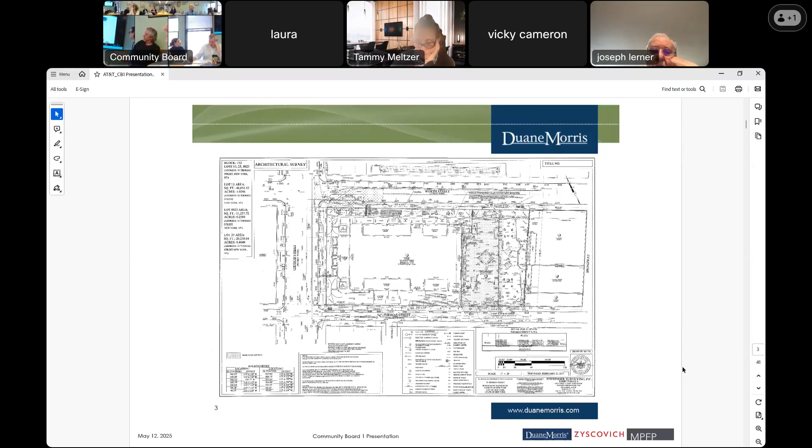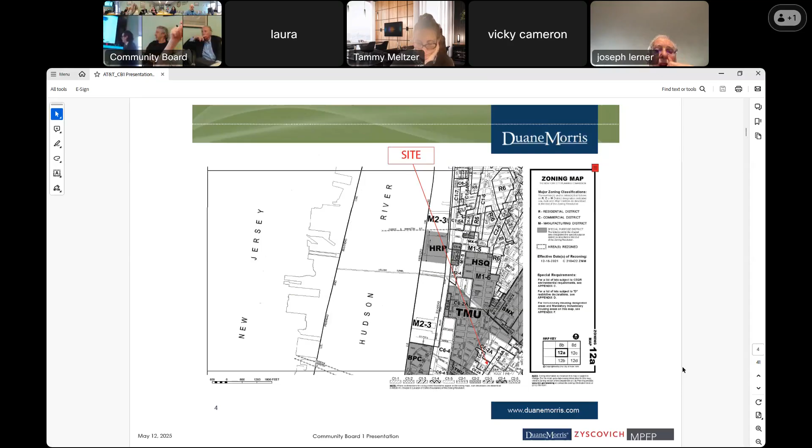And this is the zoning map, of course. This is the block that the property is located on. It's partially in a C6-4, partially in a C6-4A—a contextual district. Hello? Itself. Hello, I know.

You're good, keep going. And then just the detail of the blocks. Again, this is the block on the tax map, and we've outlined the area of the block. And you can see that.

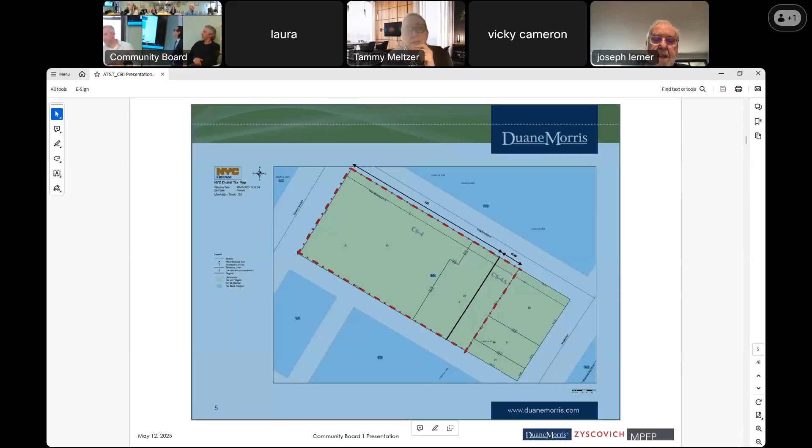Make that larger, apologies. That may be where Joe's going because I can barely see it as well. Can you? Sure, hang on one second. Yeah, thank you.

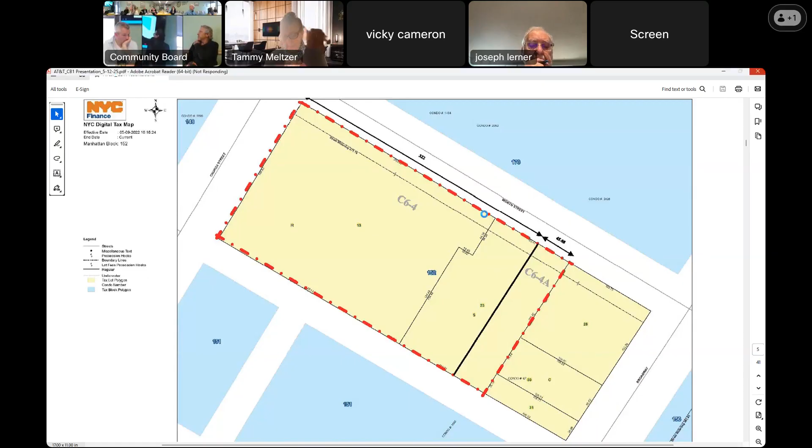Okay, and so of the property, about 75%, or more than that—57,000 square feet of the 65,000 square foot lot—is located in the C6-4 zone, and the other roughly 8,000 square feet of the 65,000 square foot parcel is in a C6-4A zone, and that's the zoning district boundary line.

It froze. If you could just advance it then. That'll probably just take a minute. Thank you. Happens to me every day, 5 times a day.

You said about 80% is C6-4. Right? Yeah, about 80, 85 actually.

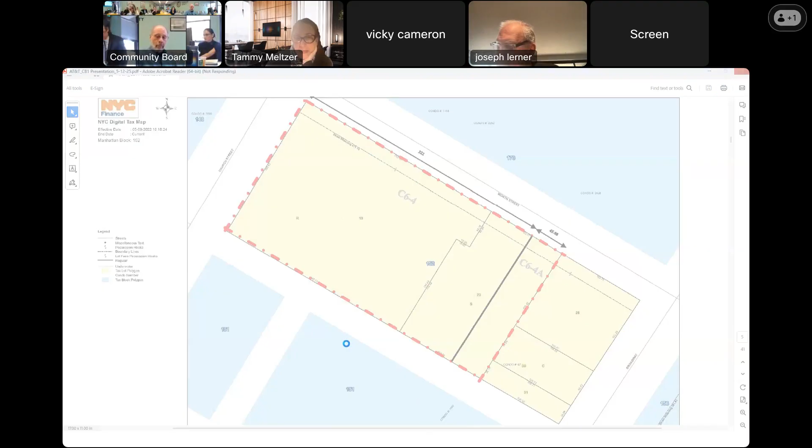We might need to reset it before it advances to the next slide. Reset it to the size you had. Maybe increasing the size had an effect on it.

Sean, while we're waiting, could you explain the difference between the C6-4 and C6-4A? I'm not familiar with those terms. Sure, so a C6-4A is a contextual zoning district, and I'm actually going to get to this later in the presentation, but I'd like to wait. Okay.

So a sailor walks into a bar.

Is it a heavy file? Should I advance it? Can I advance it? Oh, no, no, you still got the eye. Yeah, if you keep hitting it, it's just going to, no, you're going to get it mad.

While we're waiting, could you tell us the history of the plaza? How much of a give back was that to the community? How many extra floors did you get on the AT&T building?

So there was no plaza bonus taken in the development of the AT&T building in 1967. They could have utilized it, but for the purpose of the building being built, the communication building, they didn't need the bonus. So it's not a POPS plaza, it's just a private plaza, and that's why it's open and closed sort of at the whim of AT&T.

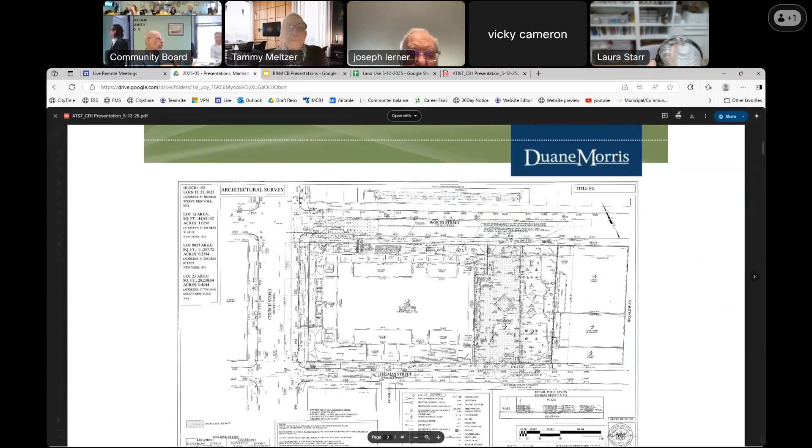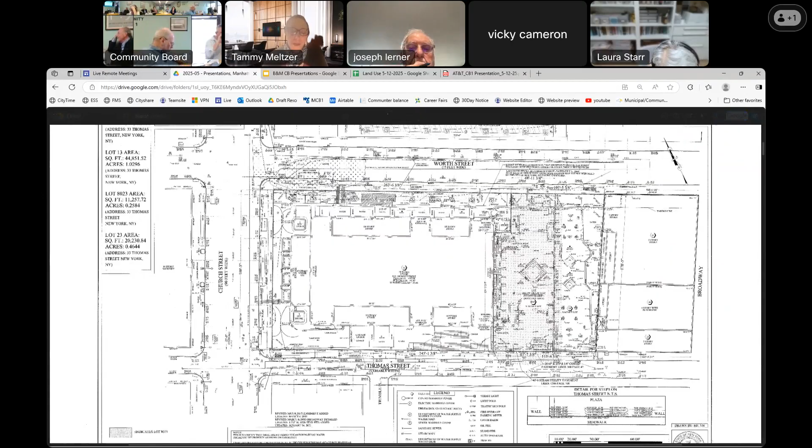Okay, I found it. I got it. Tammy, we have it up for the moment. If not, thank you, I can help you, just in case we crash, Tammy. I'm a good backup. Keep on the next. If we can just advance it. And then one more.

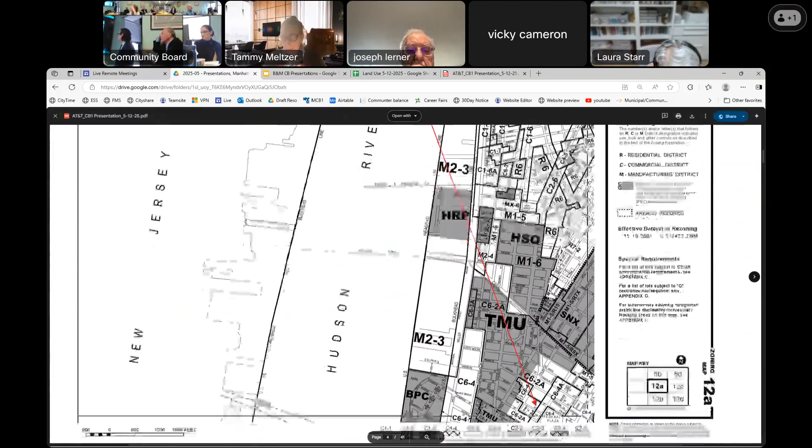So, widening out the area a little bit more, this is the site. To the north, south, west, and east, the surrounding area is all zoned C6, just like the property is. Different variations and permutations of C6, C64, C62A, C63A, C64A, all permutations of a C6 zone. A C6 zone is a high density, metropolitan kind of area, a lot of hustle and bustle, with a wide variety of commercial uses, residential uses, and permitted community uses.

C64 zones carry an FAR of 10.0, base FAR of 10.0. So the big development, before the recent City of Yes, that's more or less the biggest development you could do in the City of New York, other than in the special Midtown district.

And the developments in the area are consistent with their zoning. Orange is mixed use, red is commercial development. So you can see in this C6 area, the predominant development is either mixed use or commercial. The buildings in the area range from a 50-story building across the street from the property, down to a two-story walk-up on the same block, and six-story walk-ups on Broadway on the same block as the 50-story building. So it's a hustle bustle district, and it's developed consistent with its zoning.

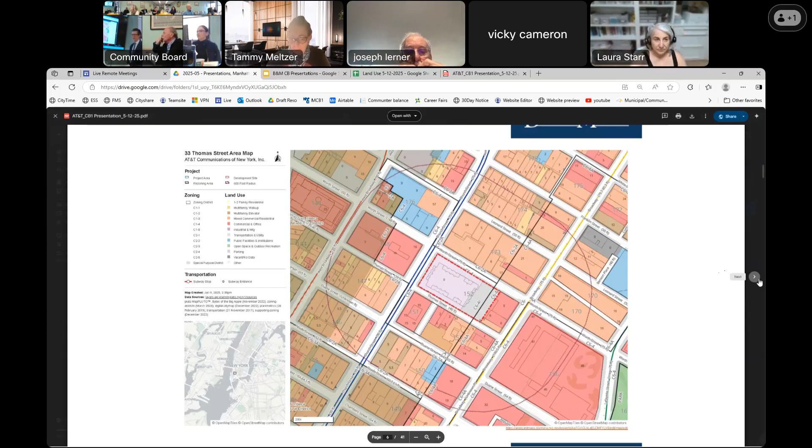So that's a little bit of setting the property with respect to the history of the property, and then leading into the rationale. Why is it that AT&T wants to sell the plaza?

So the AT&T building that we all know and some love was developed in 1967. It was developed as a major telecommunication building. It receives and forwards calls that come not only in from the city of New York, but also the surrounding area nationally and internationally. The building stands 535 feet in the air.

It's got 597,000 square feet of floor area, more or less. This building, we're here to talk about discretionary actions for the plaza. The building itself was built pursuant to a discretionary action.

It was built pursuant to a special permit for the tower portion of the building, which is above the 11th floor. The special permit allowed for an increase in the area of penetration of the tower within 50 feet of a narrow street, Thomas and Worth Street, on both sides. It was a small discretionary approval, less than 1,000 square feet of increased area penetration of the tower onto the narrow streets.

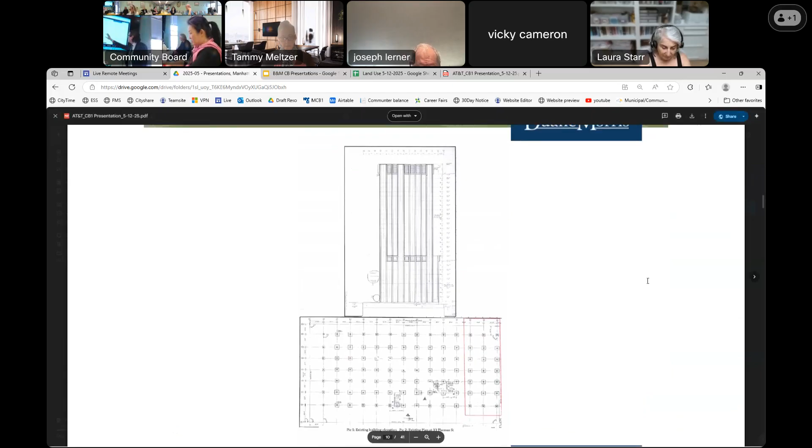This is just a screen that shows what I'm talking about in terms of how the building was built underneath. This is the AT&T building. Underneath the AT&T building are 3 subcellar levels, and those subcellar levels extend underneath the plaza, underneath this lip. So this is the columnar grid of the founding of this building.

So you can see that the columnar grid of the building, up to this red line, is of a particular pattern that then extends underneath the lip of the plaza. And so the building was actually built this way.

It was contemplated that the building someday may need to be extended, a heavy building with heavy columns in a particular grid that would carry the loads similar to the load of the existing AT&T building. So it could have been moved over into the plaza.

Don't need it anymore. And as a result, now for sale.

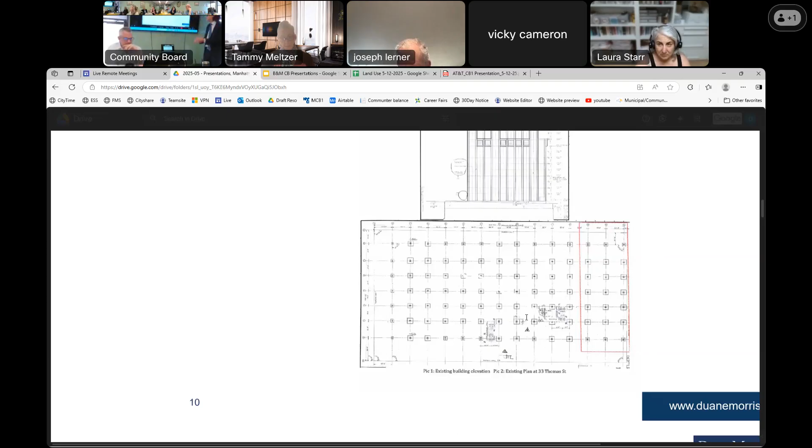So once AT&T decided that they were going to sell the property, they hired Duane Morris, they hired my firm and their other building consultants to consider the site and analyze how to maximize the development potential on the property—not the whole property, just the plaza area for sale.

They also asked us not only to think about how to increase the potential of development, but how we were going to market this when we finally took it to market. For example, if there are discretionary actions involved, are we just going to write a letter in the marketing package saying, hey, this can be done?

Or are we, AT&T, going to go to the city, get the approvals beforehand, and then take the whole thing to market as a turnkey administrative approval? This is what we considered for almost a year, actually.

Our conclusions were as follows. The first thing we wanted to do is maintain a plaza. It wasn't altruistic, but it's been there. We knew we had to come to the community board ultimately, and it's a benefit to the community to have the plaza. It wasn't altruism, but we did want to maintain the plaza.

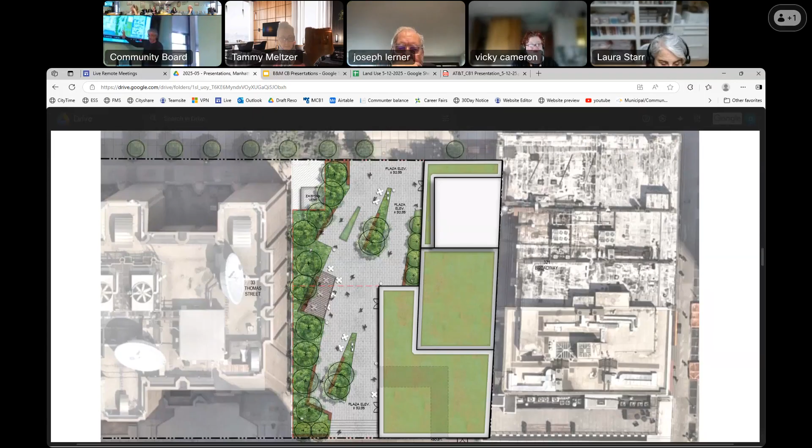There are steps here, right, along this, right? And you see this dash line here. We created this little jewel box component of the ground level, and there's ADA accessibility in here, because that's what gets us above the structural deck. And you'll see it in section. We worked through this with city planning quite a bit. There was really no other way to get any ADA access on this level.

And so you'll see it in a before and after. So if you go to the next, that's what we have today. So the structural deck is right underneath where these cars are. It's only like 4 inches underneath that. And so that's our problem.

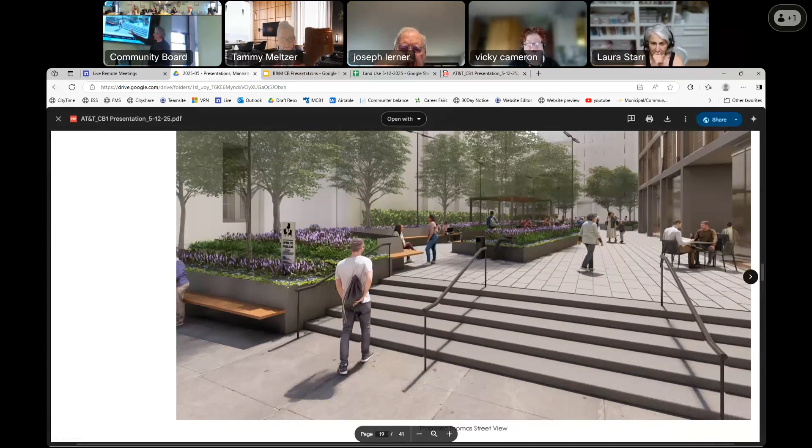What we did is we turned this wall into a stepped planter with a seat, a bench facing out. We opened this up as stairs, and then we put, if you go to the next one, you'll see, that's the before and after. Right, so these are the steps. That's the built-in seating. The other action we have is all these planters are raised because we only have about 6 inches or so above the structural deck to work with. So those are our two actions for the plaza.

Obviously, trees are supposed to be flush, plazas are supposed to be level. It is level on the other side. So if you go to the next one.

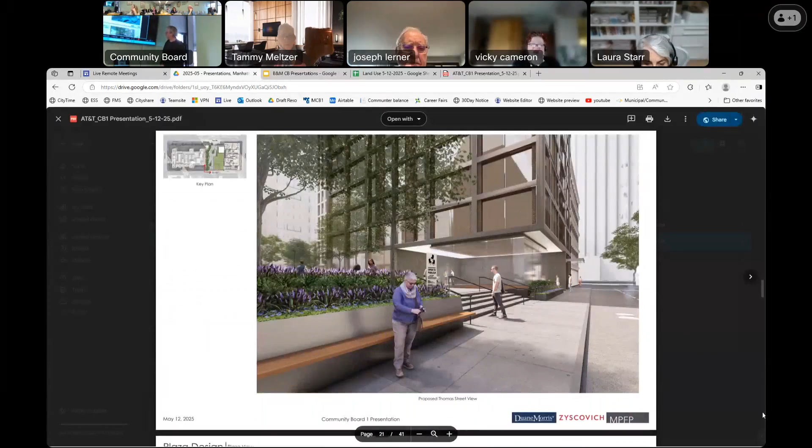So this is the before, steps here. Our building will go here. There, and one more, next one. And so there's the building. This is the glass box here, little retail component. The ADA access is behind it. So if you go to the next drawing, you'll see that.

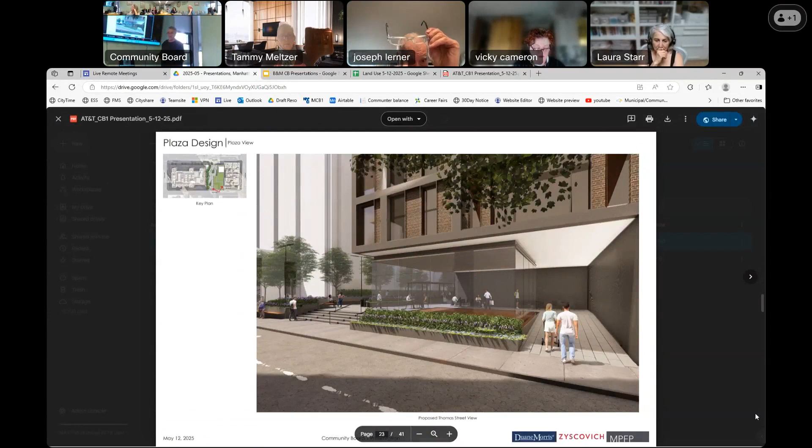That's the before, it's the after. So ADA access here, under 5%, no handrails, just a general slope up, but it gets us above the structural deck by the time we get back there. So that was our big challenge, and that's one of the actions. So if you go to the next one.

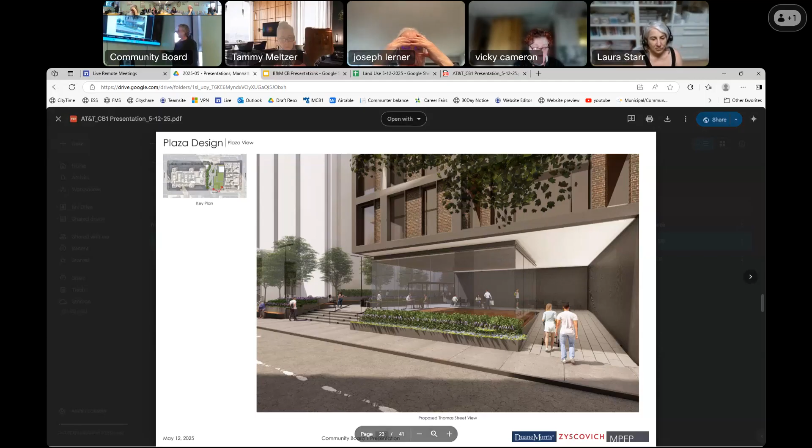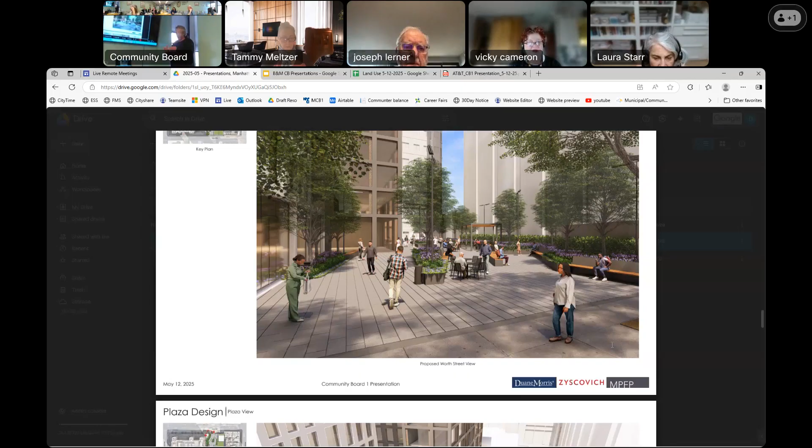This is the other side. So this is at Worth, and this is all flush. So in working with city planning, by keeping this entire frontage flush, we opened it up in the plaza steps, right? In principle, as you guys know, this is a through block, so it's actually zoned as 2 plazas. We have all that information here, all the technical information if you want to go through it. What we worked with city planning on was to create a central space in the middle that the community could use. There's a trellis there, it opens up, there's a lot of movable seating, and the planters kind of guide you through this, kind of a sawtooth type plaza design. And you'll see that in the aerial that comes up next.

So there's the trellis, that's the larger open space. And then these are all built-in seating to the planters.

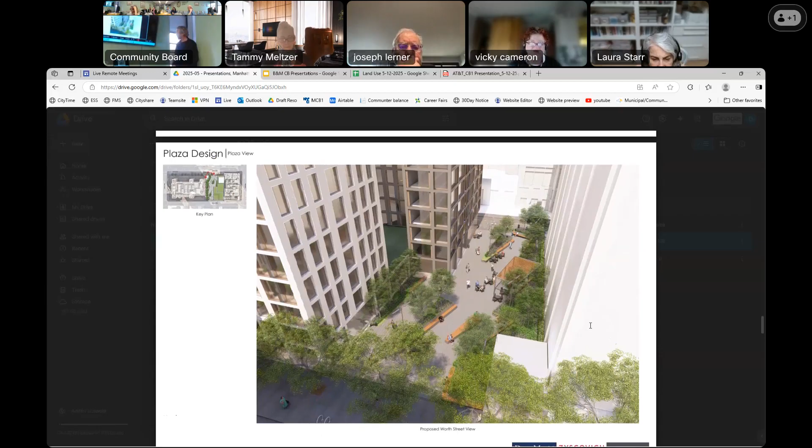Next. So this is all the technical information. So there's a plaza here, that's the through block. Then all the calculations come up in the next 2 plaza sections, which we don't have to go through much.

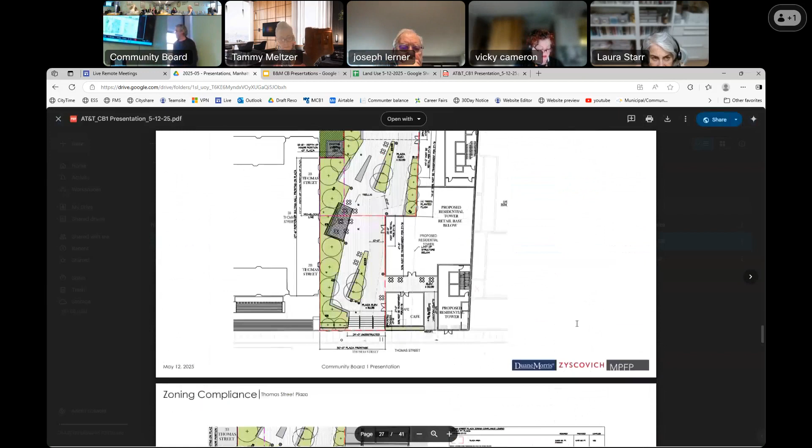Yet. Can you just go back one, sorry? Yeah. Just this, give me one? One second. Yeah, yeah.

Is the plaza across Thomas Street? Is there a plaza across Thomas Street? That from another development? I think there is. There is, yeah, I think there is. Right across top. Do they line up or are they, can someone? If you go back, you have to go to the aerial. I don't know that it shows up on that aerial. Yeah, they're not. Get it way up. Thanks, the 3D might show it too. I don't think it's a direct lineup. It's, just- that's not, yeah, it's over there. Opposite of it. Okay, yeah, they don't line up.

So, these are the calculations that show how the two plazas work on their own, separately. That's the ADA access up. We believe this is a cafe, retail here, more over there, and that's the big central open space. This is the 10-foot clear path through, and those are the steps—about 30 inches grade change.

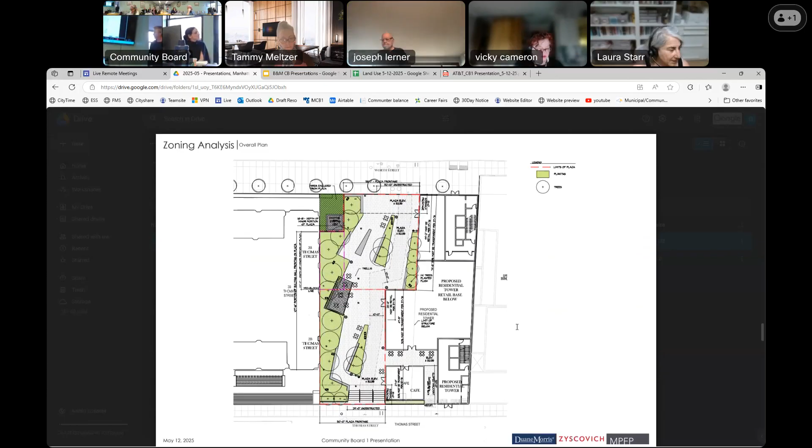That's it, we'll go into the building. The last one is there.

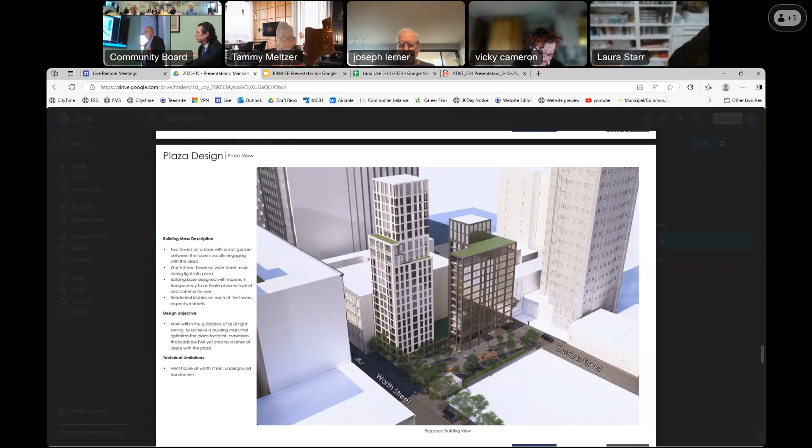Go, jump in for the next slide. I'm going to skip this, but John covered all the floor area. This is the key slide, really. So you have Thomas Street, you have Worth Street.

Oops, the appendix—I checked a little bit there, keep going back. All right, so you have Thomas Street and Worth Street, Worth Street being a wide street, Thomas Street being a narrow street. Each of the streets has its own set of regulations as it relates to height, setbacks, etc.

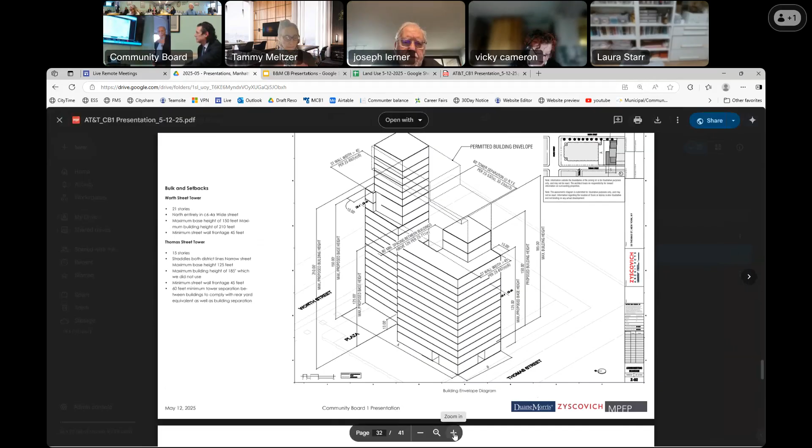What's driving this to a great extent is, as John described, in the contextual district, which is where we have most of the building, they prescribe base heights, they prescribe the setbacks, and they prescribe the maximum height. So we basically had to follow those regulations because, keep in mind, we're designing an envelope. Even though it looks like a building, at the end of the day, it's an envelope.

And that envelope could be finished in 50 different materials, but what we wanted was a massing that would work well with the plaza—a massing consistent with an as-of-right project. So what we did is work with the maximum base height to get the largest base possible, and did the required setbacks.

In the case of Worth Street, we went to the maximum height permitted, which was 210 feet. On Thomas Street, we did not go as high—we went to 150 feet as opposed to 185 feet. So we tried to work with the sun in terms of getting maximum daylight into the plaza.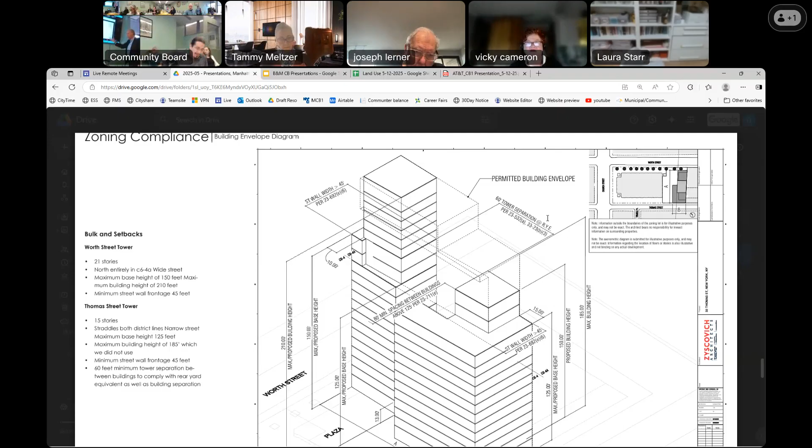We felt the other key element in terms of the massing that would be very helpful is that the plaza is not excessively wide. So the idea of having two slender buildings with a gap in between, and a one-story height building with a green roof, created more breathing room in the plaza itself. It just made the plaza feel that much larger. So that's really what's driving the massing of the building.

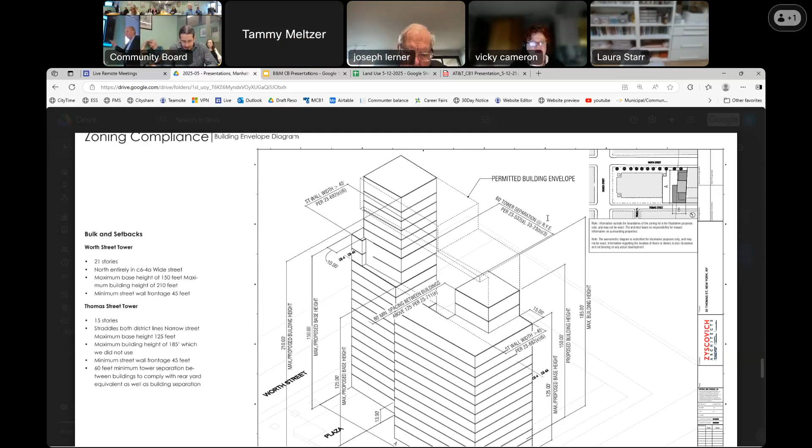Go to the next slide. Just to give you a sense of scale, this is a cross-section taken at elevation, along Worth Street. The building in pink shows the two towers and their relationship—you can see what the street looks like. We're not dealing with a lot of height here; these are fairly slender buildings. In section, you're seeing the same thing. So contextually, we feel that we've managed to work the zoning and the plaza together to create something that works well together.

Between the plaza and the building, we think they work together well, especially with that corner we discussed, which we call the jewel box corner, which leads you into the plaza itself. Visually, you can actually see through that corner to the entrance of the plaza, creating connectivity. We're trying to visually widen the plaza itself, which is the AT&T building and this other big building.

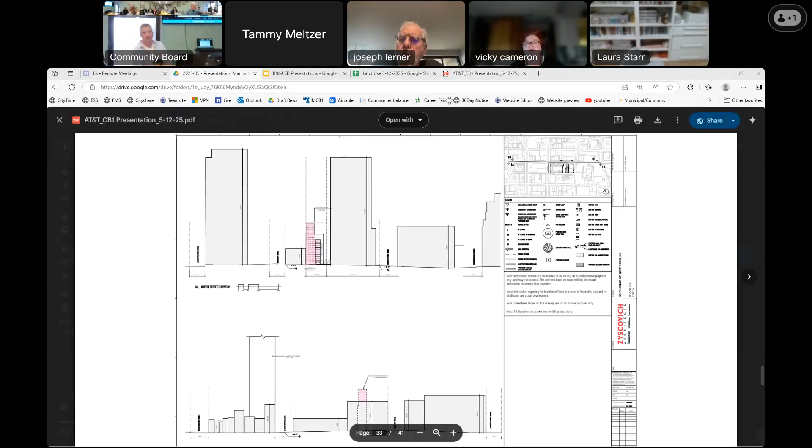So Laura had her hand up online. Would you go first, Laura? And then we'll come around the room and see who else. She's not at her seat. Disappeared. Anyway, so compelling, she just decided to give up. Anything else?

Okay, Michael, Richard, and Roger. I've watched this building for 30-odd years. My son, and then my grandson, went to nursery school right across the street, Buckle My Shoe.

I just Googled 33 Thomas Street, because we haven't talked at all about that building, and I'm amazed. It was built to withstand a nuclear strike, it was the designated shelter for the President of the United States and other government officials in times of distress. Not much is known, but there are physical lines connecting to the military, government, international countries, and various other networks buried deep within the ground, so a nuclear strike wouldn't disrupt communication. There are also underground bunkers, water filtration systems, air filtration for biological warfare, and food and supplies to last years. There are rumors of underground pathways for the president's motorcade to evacuate elsewhere for safety. Crazy stuff. There was an article in the New York Times in December 2024 saying it's basically an NSA building, a national security building, and they're publicly monitoring phone calls and the internet in this building.

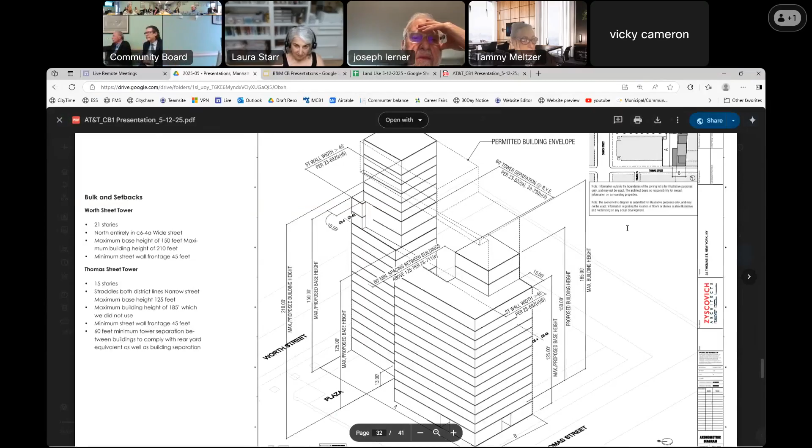Rosa asked: are there any special use restrictions on the site? I noticed recently that the Verizon building was actually a public place, a special use restriction which wasn't actually respected when it was sold and redeveloped. I'm wondering, as an infrastructure project, did this site have in place a public place or limited use kind of restriction? The answer is, I can make that one short.

We will be required to comply with all the design requirements, design restrictions, and operational requirements of the plaza section of city planning for the public plaza — tree plantings, maneuverability, beautification amenities. But other than that, the site itself does not have any restrictions on use in that zoning. No. Okay, great, thank you.

What is our guarantee of plaza improvements?

I'm guessing none of that will occur until after the development is completed. City planning will approve this design, and this is the only design that can be built. Should a developer want to amend it, they could, but they'll be handed an approval for this specific design, and that's the only one that could be built. It would ultimately be developed by a developer who has to go along with the entirety of the development.

I'd actually like to see the special permit you mentioned you would share with us. I don't have it with me, but I can send it through Zach and we'll push it out to the committee members.

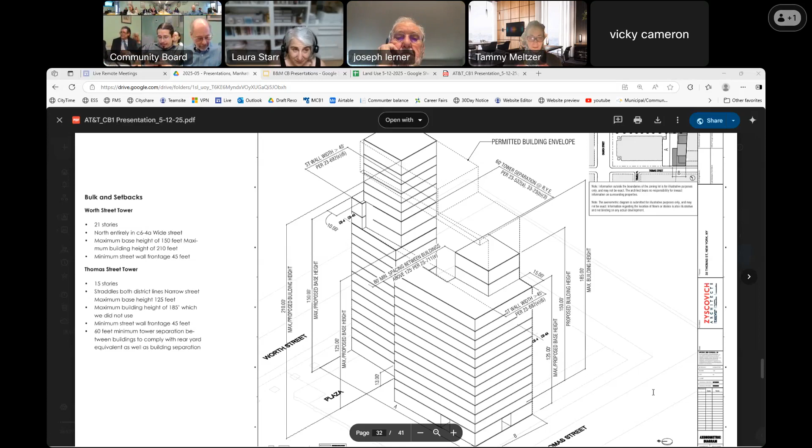I think it should have a cafe. To follow up on what Richard was saying, we're giving you the space, and it's true it's a really lousy open space right now, but I feel it could be planted with more native plants, have a fountain, and have a cafe to animate it, and I hope it's going to be really well maintained. We agree with all that. The fountain—well, the design looks a little bit manicured. I think the more native plants and the more natural it can feel, the better.

I assume it's going to have all the movable tables and chairs and things required for a plaza, is that correct? Yeah, it has all the movable tables and chairs, back seating, seating built into planters, and seating underneath the trellis.

In addition to the cafe, is it possible there would be any community uses on the ground floor, like ping pong tables or games for kids, to animate it more and serve both the youth and senior population of the community?

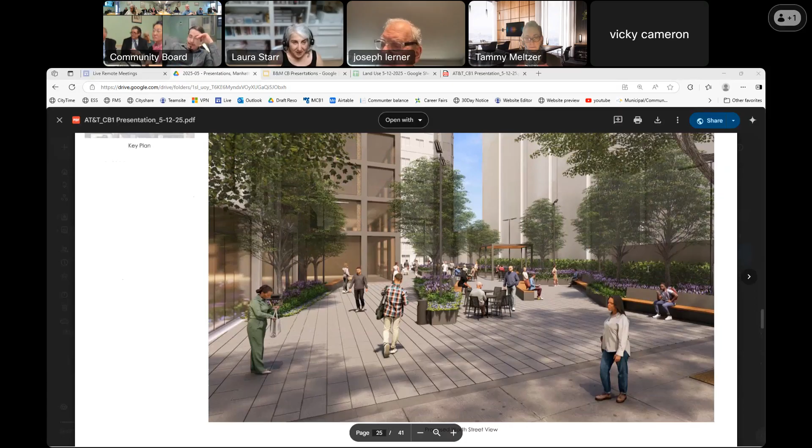It could be, and that's why the center of the plaza is more open. Originally it was more planted, but as we worked through it with city planning, we said let's create a central space that relates to the trellis that can then be programmed. We don't know if there'll be community space on the lower level, but often there is—that would be the goal, so the interior could speak to the exterior, with the cafe on the other side to activate it. That's the goal, but this is the first step.

One thing we intentionally did is put the entrances to each of the residential towers on the street side, which allows us to take the entire frontage of the plaza at that base level and turn it over to cafe, retail, or community use. There's also a transparency requirement, which is very important, so it's going to be something active that creates activity along the frontage of the base.

Is that written into the approval of the building? Do we know that's going to happen? Is it guaranteed? And to that point, the maintenance will be on the developer of that property, not AT&T. No, but I'm asking about the ground floor uses beyond residential to activate the plaza.

Yes, it's shown that way on the drawings. Right, but if it's on the drawings, does that guarantee that the next owner does it? That's part of what they're buying into, that requirement? Yes, it's a requirement.

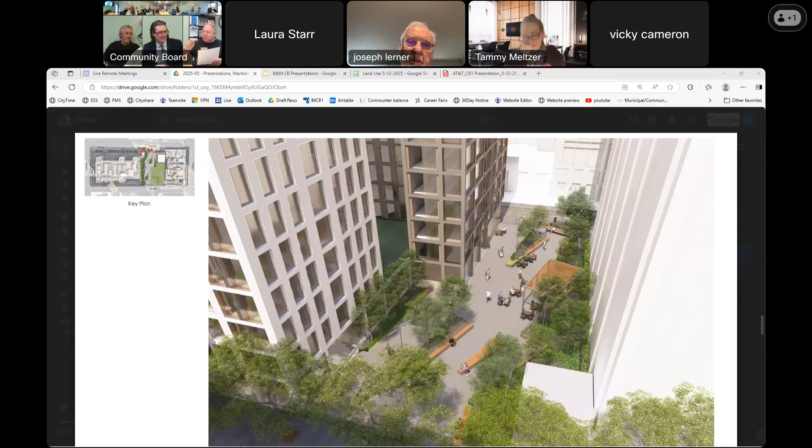I just want to piggyback on a few things that Richard said. By my math, especially since you guys have been sitting on this for 58 years - that's my age - the possible give back of the public plaza in return for 58 years of crazy inflation is minuscule benefits. It's almost not a benefit compared to what you guys have been sitting on.

As far as the building across the street between Duane and Thomas, Tribeca Tower is a luxury high-end 50-story building that has an affordable component that has been wonderful. So the developer doesn't have to be an affordable developer - it works in that neighborhood, and the 50-story building across the street is proof of that. It wasn't 50% affordable, I think it was 20 or 25%, but it was a range of affordability from low to middle. I just wanted to bring that up in case you get any pushback from developers that it couldn't work there, because it works right across the street.

And you mentioned 24/7 - in a perfect world that would be great. The reason it was closed a few years ago was, from my ears on the street, some unsavory stuff going on in off hours. So you guys had to close it and then use it for the workers' cars, which I understand both sides on.

And then one other thing, on the Thomas Street side, I'm hoping there's no intent to change whatever the parking regulations on that street are - that you're not trying to change any regulations, that it just stays the way it is now. No, no change. Okay, no change.

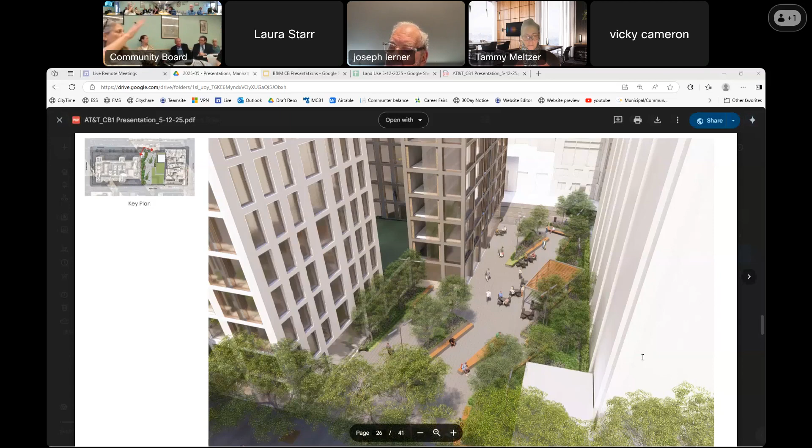It's a little unclear what's going on with the buildings on the east side of the street. I couldn't really see the alignments. How far away are you from those buildings on the east? The zoning allows for, was it 40 feet? The buildings on your lot, on the east side of the lot, the opposite side—am I wrong, that's east, right? Yeah, that's east.

So the building you're seeing has 1, 2, 3, 4 facades backed up against—I'm just curious how many feet between, for example, those buildings. So our buildings are built to the lot line, are they, Larry? Yeah, they're built right to it—it's an as-of-right development on our side. The envelope would be built to the eastern lot line of the building.

Now that's going to come pretty close to the rear yard, the rear edge of the buildings fronting on Broadway. But it's an as-of-right development, we're not asking for any. I understand it's as of right. I'm asking how many feet are you giving—these buildings are all not in the same plane. Is there some air gap, and first of all, are these buildings aware at all of this development that's going on?

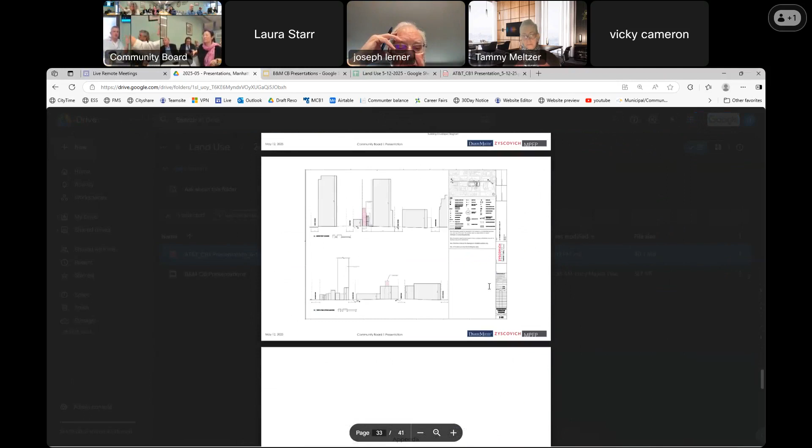Yeah. Well, first of all, I'd like to say that at some point we may want to run a resolution on this, because there's a lot of things we probably want to say. One is these people should know exactly—I'd like to see the diagram of whatever the lot line is, but it's sounding like they're smashed up against a lot of people's homes. Why don't we collect those points for the applicant and see if they're responsive. What we could do is overlay the survey on top of the site plan, and then we'll know the exact—so you can see it. Right, so okay, that's one.

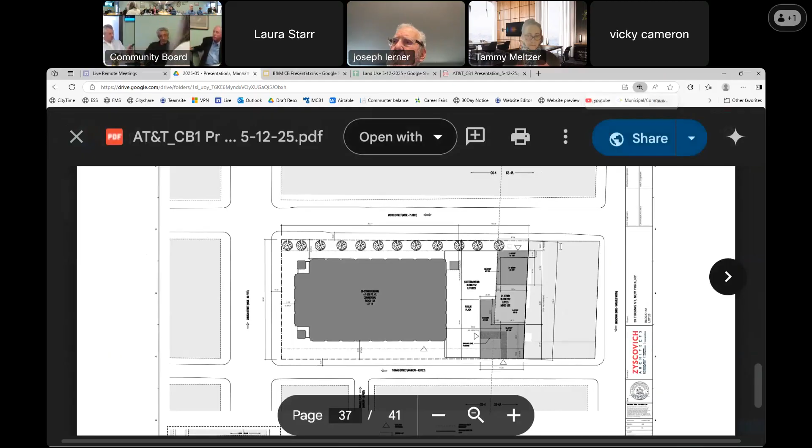And so in that argument about as-of-right, and we talked about this before, and I'm glad somebody brought it up—I was surprised it didn't come up right up front—this is a potential plan. It is certainly not the plan. It does not have to happen. I think people in the public have to understand that. It's a lovely plan, done a very nice job, but the fact is this plan could be altered so that it meets the new City of Yes, with all the hurdles that might entail, and you would have no plaza there. There is no guarantee of a plaza there. You're even nodding your head, yes. And people need to understand that. So I do think this community board should write a note that would go along with your application, saying what we do and don't want to see there. But the fact is there is absolutely no requirement for a plaza there, and this could get a much, much bigger building there.

I understand. Well, that's it—correct me if I'm wrong, I'm not wrong on that, right? And you're saying there's an as-of-right solution to developing this lot? No, it's not as of right. It would not require rezoning. No, not at all. With City of Yes, tell me if I'm wrong, this could be rezoned so that the plaza would go away and you'd have a bigger building. I hate to sound simplistic, but in just two sentences, that's the fact, right? Yes, that's true. There we go.

That's all, and I just want to make sure we're all aware of that. And it's important that at this point we understand this is a leasing agreement—this is not AT&T's development. So we're looking at something that's a maybe.

So we're worrying about where the chairs and planters are. It could be there are absolutely nothing.

I'd like to, in future presentations, acknowledge that though we may all hate or love this brutalist Warnecke building, I cannot believe that Warnecke didn't design that plaza. And that plaza does have a history and is quite lovely in many ways, I would argue.

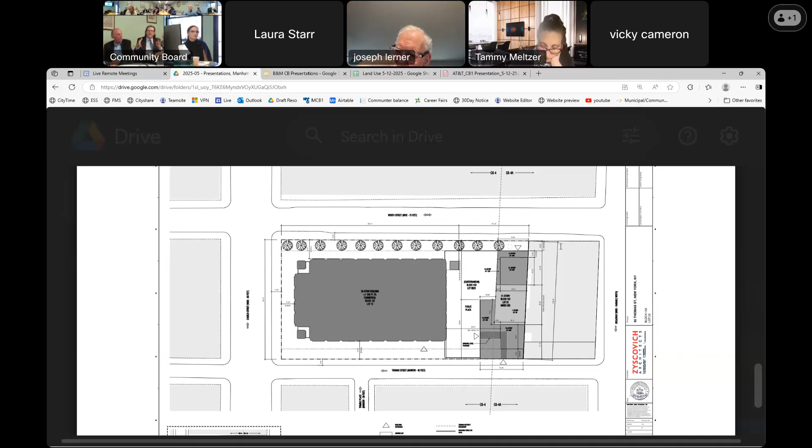The plaza site is smaller than the site across Thomas, the 50-story building, which is 400,000 square feet. So thought had to be given to how to best develop the site without impacting the light and air, because the AT&T building is so big. We wanted to let the site breathe as well, so that was part of the consideration.

The last thing I want to make clear to Alice—I thought I said it, but if I didn't, I apologize—is that once these approvals are in place, if they ever are, the only thing a developer who buys that building will be able to develop, short of going back to city planning and starting from scratch, is that approval: this plaza, assuming it gets approved, and that envelope.

Is there a chance a developer could buy the site and say, thank you very much, no thank you? Yes, there is a chance. But AT&T is comfortable that they are bringing to market a site that is very, very likely to be the one that's developed. Why do they think that? It's not like they've been paying all of us for almost 7 years now, a lot of money, to sort of—oh, big disclosure there—I'll take it. But the point is, if AT&T didn't think this was going to be a viable development, we wouldn't have been doing this for the last 7 years.

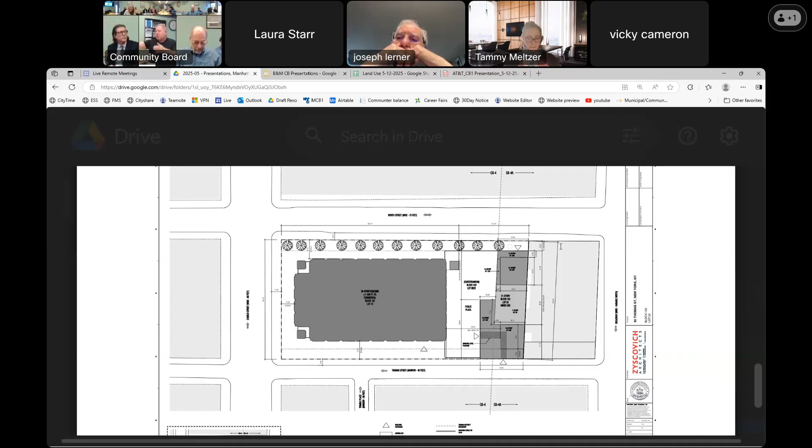So I'm just hoping—I know they want to maximize profits—but just hoping that quality of life on the commercial side, on the lower floors, would be considered, even though whatever influence AT&T has in picking it, it's being given to a developer. But that is a concern in the community.